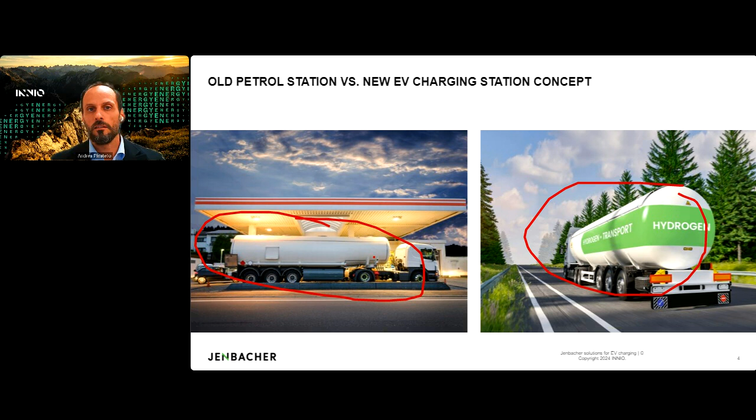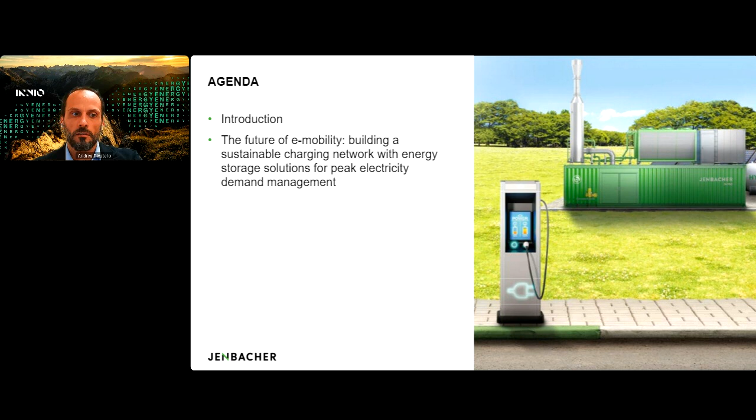Going through a brief agenda, we will see some background information to better understand the numbers behind the future of e-mobility, the solutions that can be offered for these energy storage requirements, and the role our products can play in this future world. Then we will deep dive into the case study, the core of our white paper: a real study to power a 1 megawatt EV charging system with hydrogen. Then there will be time for your questions.

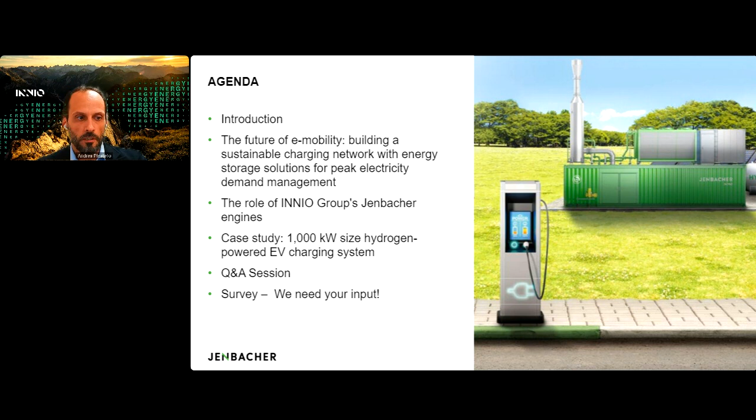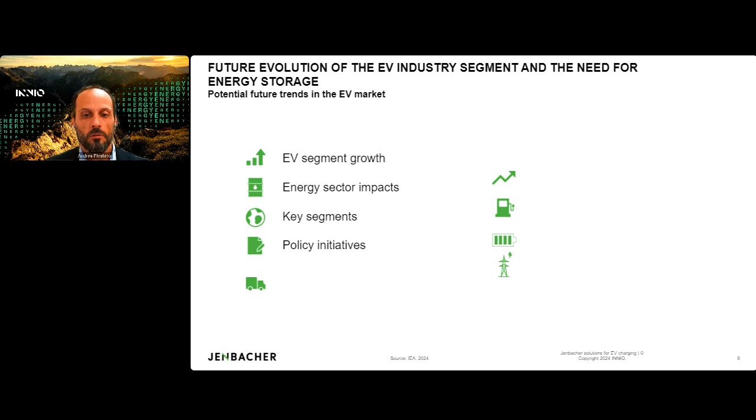So we have also identified key markets, key segments for EVs, like China, where 60% of the global sales is going to, and Europe with 25%. There are many policy measures and incentives for EV and battery manufacturing. For example, there is the production-linked incentive scheme in India. There are, of course, subsidies coming from the US Inflation Reduction Act. And this is also something that applies to the battery production and to the supply chains. There are investments in EV and battery manufacturing for almost 500 billion from 2022 to 2023 globally. So these are numbers that are really, really impressive. There are also emerging economies which are becoming important in this market, for example, in Southeast Asia.

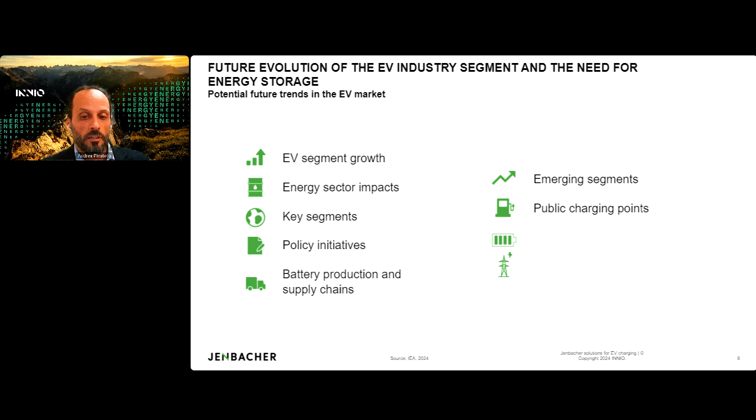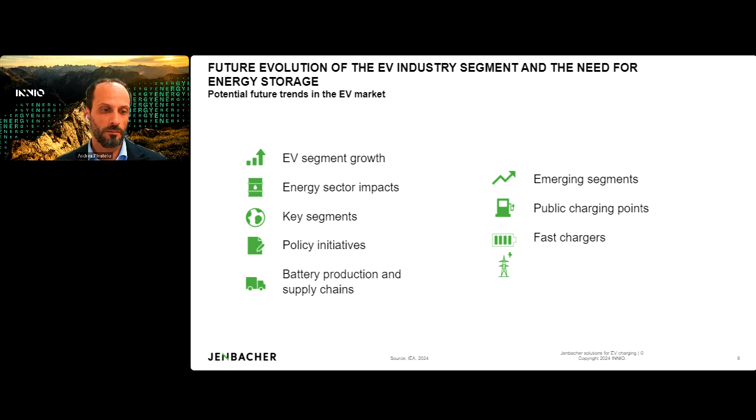And in addition to that, what we see as a very big trendy topic is that the global number of installed public charging points increased by 40% in 2023 compared to 2022. But the aim is to, let's say, increase sixfold by 2035. And then the fast charger. So this is also one of the reasons that draw our attention to the fast charging solution. We see that according to this IEA report, the fast charger will be developing much faster than the slower chargers, also because there will be more electric heavy-duty vehicles hitting the road, and they need dedicated flexible charging. And all of that will have a significant implication for expanding and operating the electrical grid.

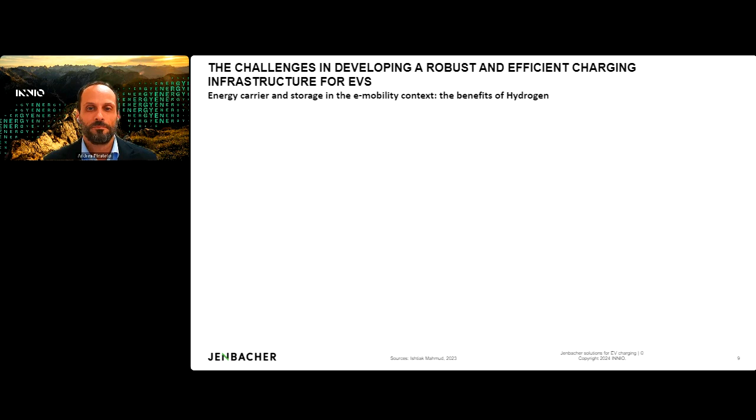And I will continue taking from the last concept about the fast charging that Andrea mentioned before, because we should always remember that one of the main problems when we deal with relying on electric vehicle infrastructure is the fact that there is a very high power demand when you need to recharge a battery with a certain capacity, that is an energy, in a short time.

And when you think of the power side, so the design of a power system capable to support multiple and concurrently charging electric vehicles, you can imagine how the complexity of the system increases. This is because you need large cables, you need to manage the heat management part of the pipe of the electricity, and all these aspects bring challenging cost and investment strategies to follow in order to make the infrastructure

robust and resilient. Another aspect that is important is that this fast charging requires high performance in terms of availability and reliability. And of course, for ensuring that, backup solutions and energy storage solutions can play a pivotal role in supporting the transition.

And the key competitive advantage that we foresee in hydrogen integration in the electromobility infrastructure is that they are not just a storage solution, so they are not just hardware, but they are also an energy carrier. That means that they are easy to transport from one side to another. And at the same time, they can be seen as a storage solution for short, medium, and long term,

while electrochemical energy storage, and I will deep dive into more details later on, has some problematic aspects related to the availability of the material to build up the batteries, and as well that once they are located in a location, the battery is a static energy storage solution.

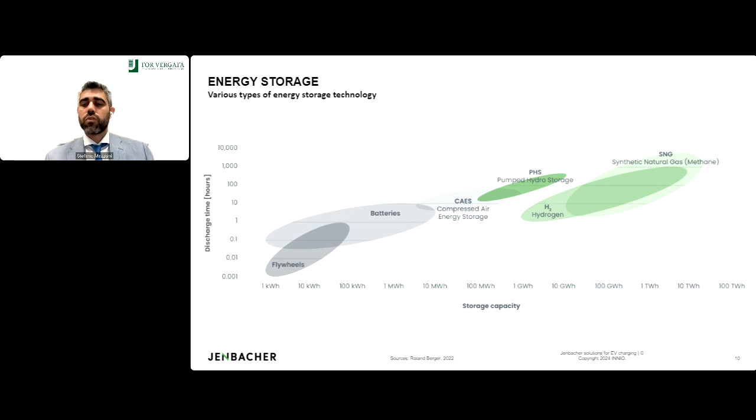So you can see that clearly a solution based on energy carriers can supply and support the trend of the electric vehicle infrastructure forecasted by the IEA to rise up to 5 to 10 terawatts of installed capacity in the next decade. And now I give back the word to Andrea.

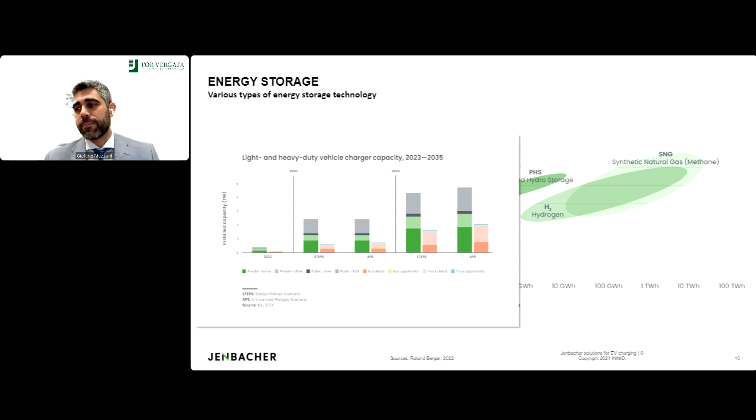Thanks, Stefano. Thanks a lot. So now, before we start with the white paper case, I want to show you very briefly the system concept that we have developed. In order to understand really how we can create a virtual pipeline and bring hydrogen to power the EV site, we need to start with the requirements.

And when we say requirements, we mean how many cars we want to charge, for how much time, and especially what are the cases and the statistics that could help us make a proper simulation of a business case. So we wanted to study it a little bit in detail. It's not easy to find literature about possible loads of this kind of charging station.

But we have been trying to make an iterative process running through technical feasibility and financial viability. So we have done different iterations in order to find the best sizing of the entire process to stay within a megawatt size, which is, in our opinion, a middle size that could be helpful to understand the business case and also develop it for other sizes.

And then what we also targeted was other energy consumers in order to provide a better financial viability of the entire concept. So we will see the details later on, but before we go into the details, let me introduce the core of the idea.

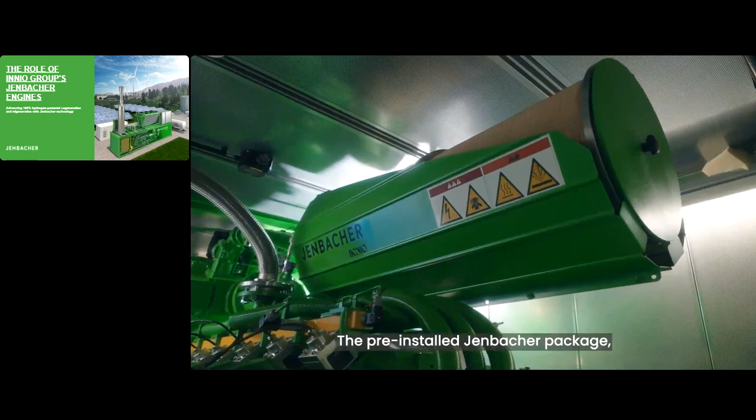The core of the idea is the Jenbacher engine, which is capable to run with 100% hydrogen and can provide power generation and cogeneration and trigeneration as well. And I would like also to show you this brief video, which shows very clearly the product that we are talking about. So this is a containerized unit of 1 megawatt size producing electricity with hydrogen. It is a plug and play solution.

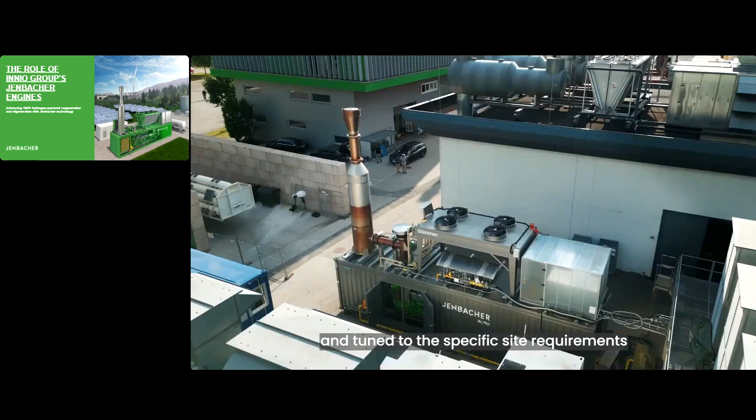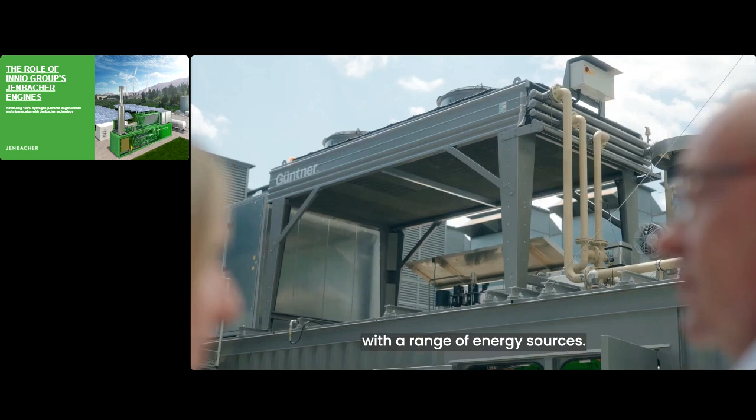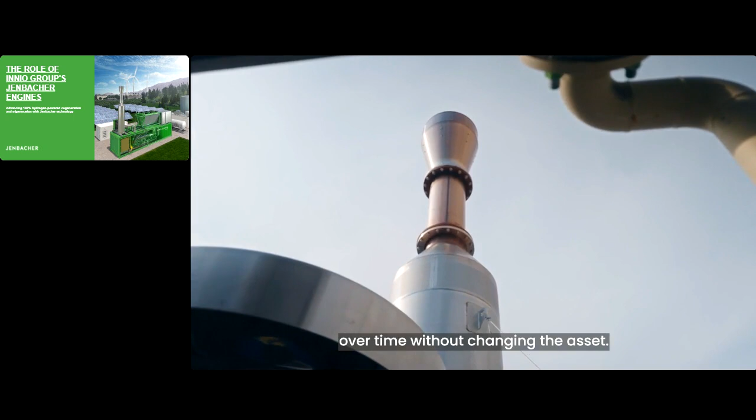Here you see the video from our factory in Jenbach, where we have tested this solution some months ago. So it's quite a recent project. And so many details, some that are familiar with our products know, but here really you just need to plug the hydrogen source and the electric cable, and you have a turnkey solution that can really very fast provide the solution to the infrastructure, because really in few months you can go from the start to the deployment very easily.

So category A is the standard engine that is already available with capability to run up to 5% of hydrogen in the pipeline gas without any modification. And there is also the optional standard product, which could run up to 25% of hydrogen in the pipeline gas. Then we have the second category, which is the most interesting one in terms of this timing of transition from the natural gas to the next phase.

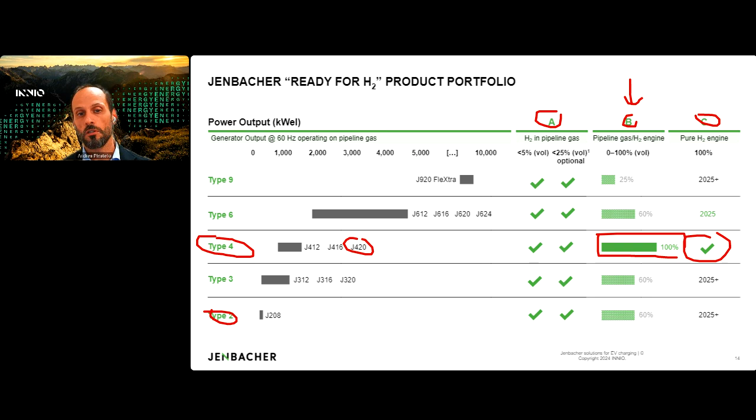And this is category B, and this is an engine that is capable to run from 0 to 100% in volume of hydrogen. And you can see here that the Type 4, which goes from 500 kilowatt to 1 megawatt, is capable to run 100% hydrogen. Or as well, which is category C, we can run with only a pure hydrogen engine. So in category B, you can run with 2 fuels, dual fuel, hydrogen and natural gas. And with category C, you can run only with pure hydrogen.

And here another slide in order to illustrate a little bit better what I just said before. So this shows really the demand from our customers when they want to go to an asset that is capable to run in different solutions, but with the same asset. So they can start with a natural gas asset capable to run up to 5% volume of hydrogen. And then the same asset can be, with a low-cost package, converted to ready for 25% hydrogen. And then with another package of modification can be switched to a hydrogen asset. So here we see really the flexibility of the same asset to run through the demanding period of the transition that we are facing today.

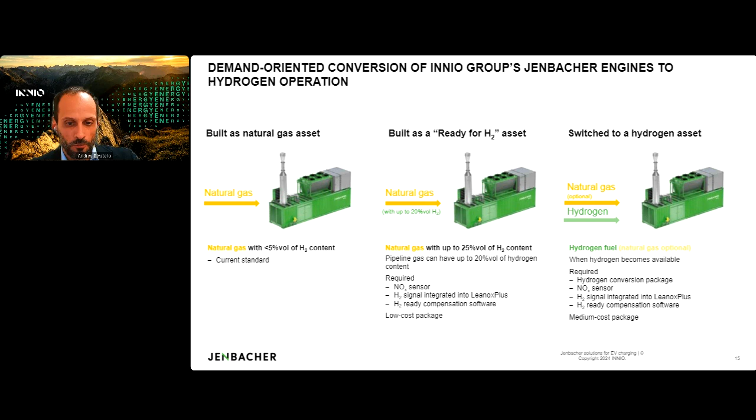And last but not least, I would like to show you some of our projects worldwide with hydrogen. And in particular, I would like to mention HanseWerk in Germany, which was the first plant that has been converted from a natural gas source to a hydrogen source. So this was an existing engine that was running on natural gas, and the customer wanted to change it to hydrogen.

And another one that I would like to briefly mention is RAG, Austria, which is the first European cogeneration plant running on hydrogen. And in this project, our customer is producing hydrogen during the summer period and is storing this hydrogen in an underground storage to use the summer sun to power the winter energy. So this is really the concept that Stefano was illustrating to us before, that we need this kind of energy vector in order to use the energy from renewables when there is no possibility to do so.

So now I think we are ready to deep dive into the case study. And again, we have seen this overall concept. So we will start now with the first flag, the start requirements, where everything is starting from. So the number here we are showing you is that we are targeting 8 charging stations of 125 kilowatt of power. And making some evaluation on the loads, we have been working together with software for simulation,

which is called Xendee. And with this software, we are able to simulate EV charging demands. And we are able to make the design of the load curves according to potential usage of the charging system, of the charging of the vehicle. So at the end of the day, after many iterations and many assumptions, we have ended up with a load curve, which is here one simplified version.

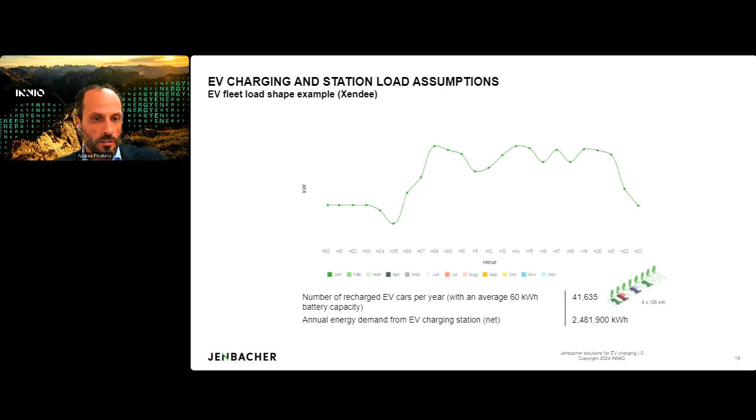And we end up that we can charge more than 40,000 cars per year, assuming that they have an average 60 kilowatt hour battery capacity. So in total, we are summing up to more than 2.4 million kilowatt hours, right? So this is the starting point of our assumption. And now I leave the stage again to Stefano to proceed with the technical.

Yeah, thank you, Andrea. I will deep dive a bit more into the mathematical formulation of the problem, but then I will sum it up in a more practical way. After having set the demands, so how much electricity we need to satisfy with the green hydrogen generated, we need to understand from the technical perspective and from the economic perspective which are the optimal configuration of the renewable energy source, of the backup and the energy storage, plus the transportation capacity that allow the solution to be economically viable, both from the end customer perspective and from whoever generates the green hydrogen.

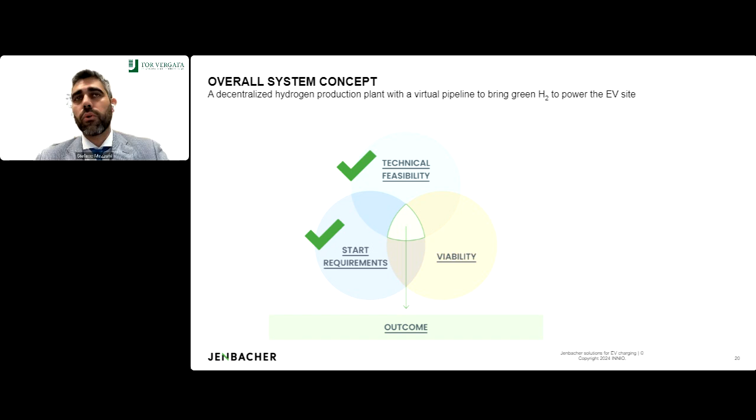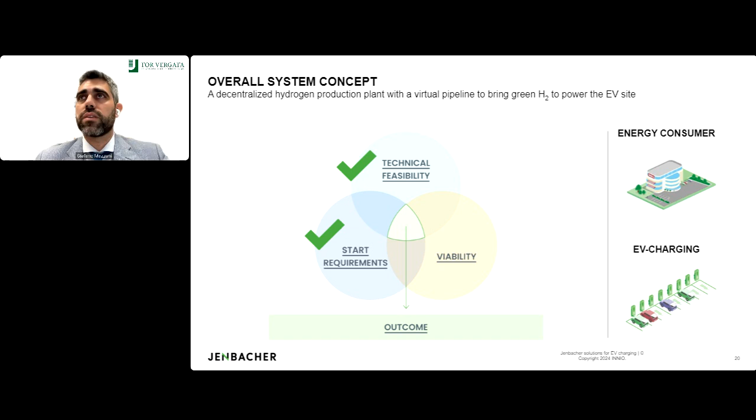So for doing so, we have developed together with Andrea and INNIO a model that we run to validate some of the data available in the literature to understand how we could supply concurrently electricity for electric charging at high tension, so for fast charging, and then given the capacity of cogenerating of the CHP unit equipped with the INNIO engine, also additional assets such as heat and cooling for energy consumers.

So the results of the optimization, that was a constrained optimization based on a mixed integer linear programming approach, we were able to establish the capacity of the solar field that was in the size of 12 megawatt. And the electricity generated by the renewable energy resource, as you know, is intermittent. So we can supply the excess of the electricity to the grid when not needed. We are able to charge an electrochemical energy storage of 8 megawatt hour. This is the result of the optimization.

And how we establish this number? We establish this number because we need to be able to feed electrolyzers with a capacity of 70 kilogram per hour of hydrogen. So this is the constraint that we had from the optimization perspective in order to satisfy and supply all the electricity demand for charging the up to 40,000 vehicles in a year that Andrea mentioned before.

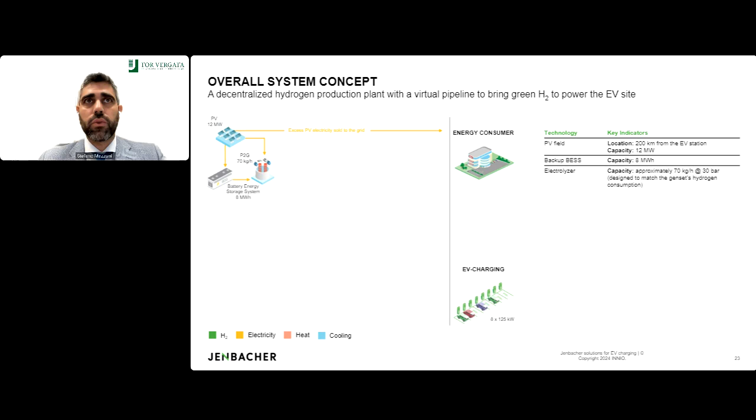What we did was, on the first stage, we used the data given by Xendee, that is a software platform used by Andrea for running the preliminary simulation to understand the solar availability in the field. And then we integrate with some tool that we developed internally in the university, on an optimal dispatching profile in which we understand how we should operate.

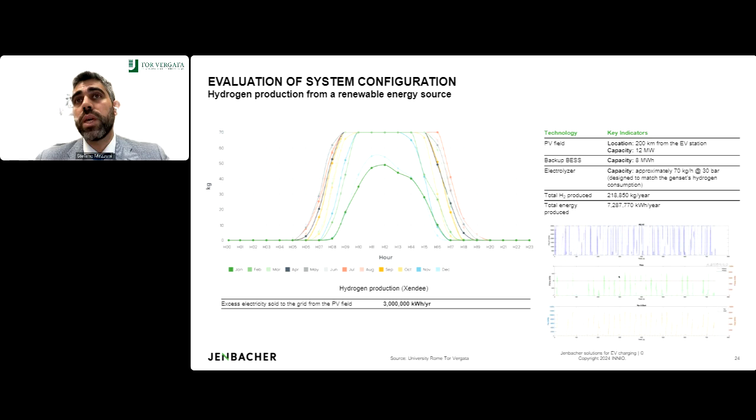Here it is a bit light, but there is a light gray line that shows the state of charge of the battery, in order to guarantee that the electrolyzer can work almost at nominal load, because the electrolyzer suffers from part load operation, for the largest hours of the day possible, and simultaneously to be able to export the electricity when the grid requires it.

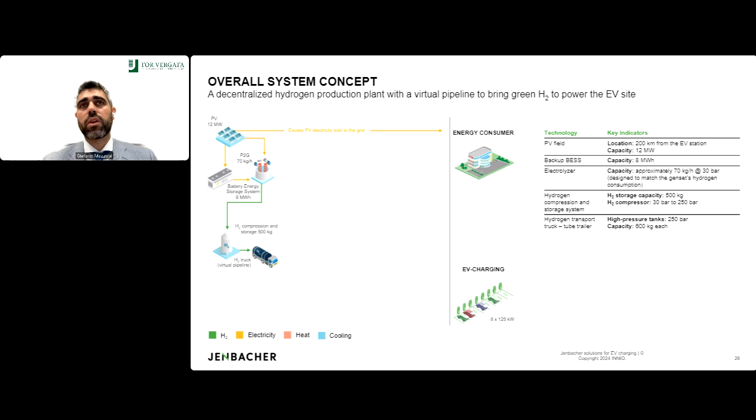So as a result of the optimization, we were able to supply an almost constant load to the hydrogen compression section, which was designed with a 500 kilogram hydrogen storage tank with a pressure between 30 and 250 bar to be delivered by the compressor. And at the end, to deliver the hydrogen produced in site A to site B, that in our assumption was about 200 kilometers far from the electric vehicle station, we needed to adopt a virtual pipeline. So basically, we're relying on H2 trucks.

We make some calculation, of course, because it's fundamental to account for the embedded emission in the transportation process, given the fact that they run on diesel fuel, gasoline fuel, and to account also for the cost of the transportation that should at the end of the day be included in the levelized cost of hydrogen evaluation.

And by the assumption that we received from a vendor - Andrea will give you more details later - on the details of the H2 truck company, we're able to calculate almost 1.4 euro per kilogram of hydrogen of transportation with an emission below 0.4. This number is very important, because a number in that order of magnitude would allow incentivization mechanisms in other parts of the world. I give you back the word, Andrea.

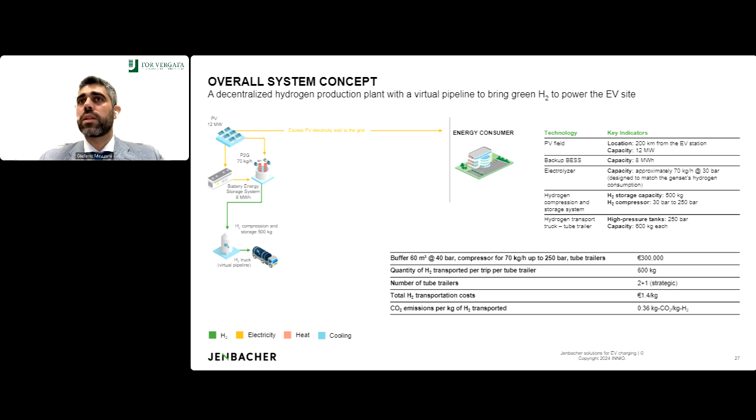Yes, thanks, Stefano. So if we look here to the truck that we see represented, what we wanted to do is ask a specialized company called PRF to make a study for us regarding this specific case, in order to provide the best solution to transport the hydrogen from site A to site B, which is 200 kilometers away.

So what they did was calculate the buffer storage, calculate the compression system, and calculate how many trailers are needed. So we have 2 trailers plus 1 strategic. And with this configuration, we are able to bring the hydrogen in the quantity needed by the load that we have seen in the previous slide.

So this calculation was really, really important in order to check what are the hydrogen transportation costs. And of course, we have also done some literature research to see if our assumptions were correct, and we see that these numbers are aligned. Again, I would like to remind you that all the detailed information is written in the white paper.

So here, for the matter of time, we cannot go really into all the details. But if you have the pleasure to read the documents, you will find all the answers to maybe some questions you could have. I would like to highlight that you have the possibility to make your questions in the broadcast system. So you can go to the survey and input your question, and we will be able to answer all of your questions at the end of the webinar.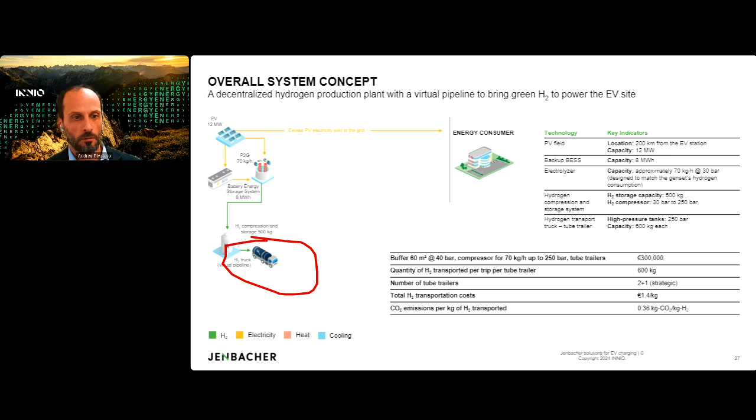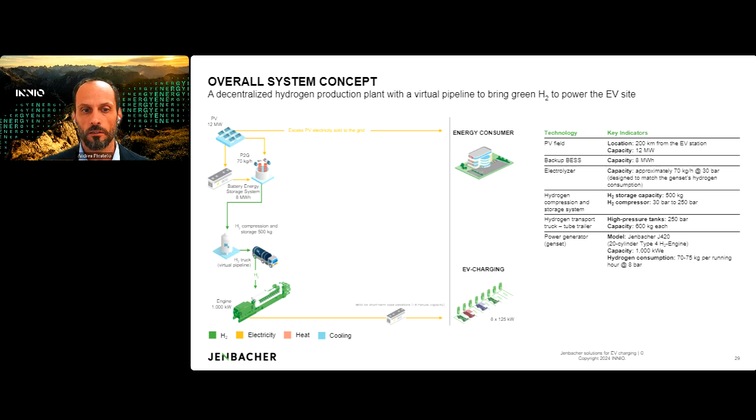So when we bring the hydrogen to the site of use, here we find the engine. The engine that we have seen before will take the hydrogen and produce the electricity for the EV charging. In the simulation model, the simulation suggests us as well to include a small battery for taking the fluctuation of the EV charging load curves. So here it is an additional little battery, which helps us stabilize the flow.

And yeah, so what we have to do is comply with this load curve. In addition to that, we want to use all the benefit of the engine as well on the heat side. So in our assumption, we are thinking to deploy this solution to an EV charging station, which has also some other energy consumers like a little shopping mall or restaurants and so on.

You know that there are small and big charging areas. So this is more targeting a big size charging area with a lot of facilities. So they have heat demand. And what we have done as well in the simulation was to include an absorption chiller and a peaking boiler that runs on hydrogen as well, in order to fulfill the load from the thermal side of the mall or of the charging station altogether.

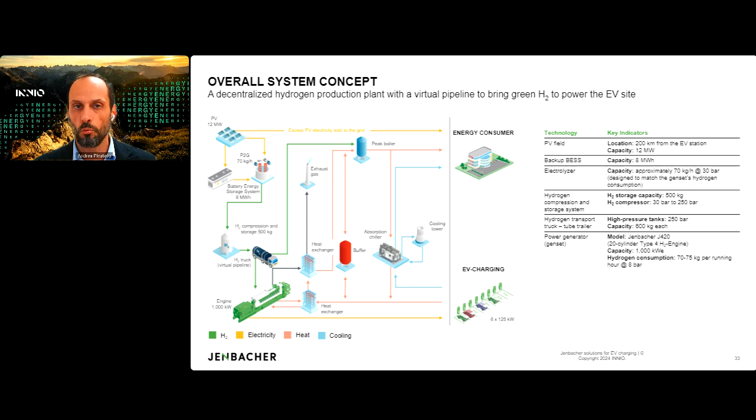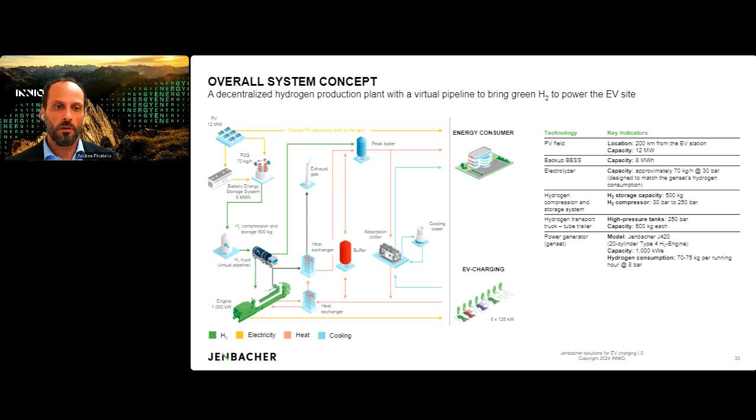So here we want really to squeeze out from the engine all the efficiencies possible, because this hydrogen that we are delivering is very precious and very expensive, so we don't want to waste anything from that. So the efficiency for us was really an important pillar to highlight that, you know, efficiency still plays a big role even in the decarbonization path.

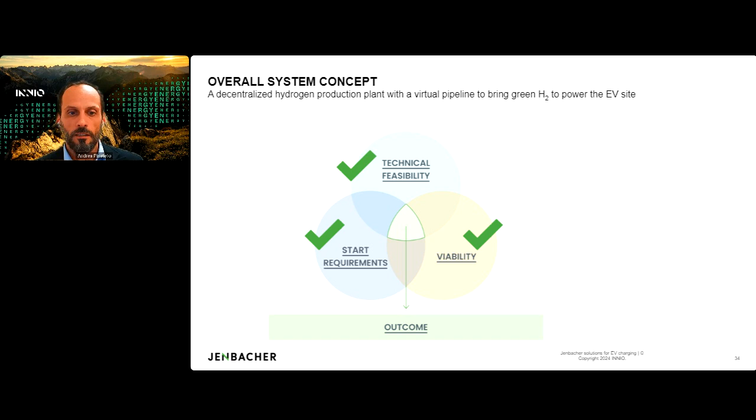And then what we wanted to do was see if this idea, technically developed, was also financially viable. And we will see now how the numbers will come together.

So in terms of cost, we have used cost from the market, and we wanted to give real figures for installed equipment. So we were considering CapEx and OpEx for a period of 15 years, because 15 years is the normal time for this kind of project with a cogeneration unit. So we wanted to make altogether cost for capital expenditure and operational expenditure in one line, and what it ends up, if we sum all the items in this simulation, we reach a number of 25.5 million euro for the 15 years. So this is one important baseline. You might think it's a big number, it's a small number. We will see it later.

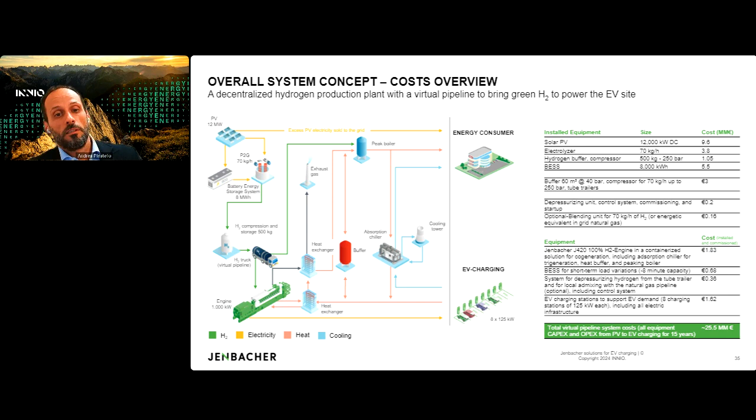And here I, again, hand over to Stefano.

Thank you, Andrea. The first evaluation of the capital expenditure was fundamental, because for accounting the overall cost of the hydrogen generated from renewable energy source to the electric vehicle infrastructure, we need to account for all the costs, including capital cost, operating cost, and the amount of hydrogen produced.

Here we make a brief sum up of the constraints. We needed to deliver about 2.5 million kilowatt hours of electricity for the charging station. We account for above 40,000 vehicles. We have roughly 2 million kilowatt hours of heat generated by the cogeneration unit, leading to almost 1 million in revenue or savings compared with a typical district heating price of 4 cents of euro per kilowatt hour.

And we arrive at the cost of the green hydrogen, in a range between 10 to 10.5 euro per kilogram. The question could be, is this price high or is this price low?

This is very interesting to discuss, because if we had run a simulation—and we did this during the project with Andrea—just for the month of August, this cost would have been around 6. If we had run that only during February, the cost would have been around 14. So the message is that this price accounts for all the seasonality we encounter over a year in a continental climate region like Europe.

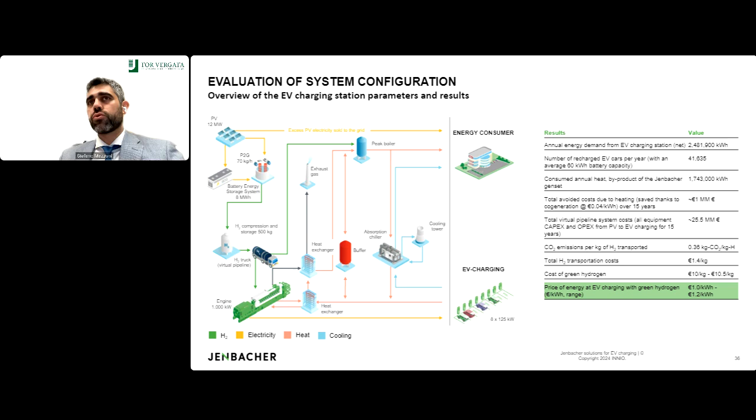So I give back the word to Andrea.

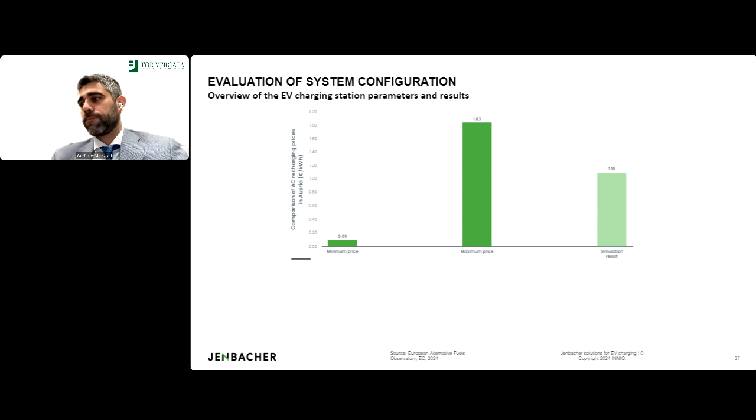Yes, thanks, Stefano. I will take exactly from here, because when we look at the numbers, we have 1.1 euro per kilowatt hour on average at the charging station. If you look on the European Alternative Fuels Observatory, you find all the prices of EV charging stations.

What we've plotted here is the example for Austria, because Jenbacher is from Austria, and the minimum price Austrians paid for charging the car was 0.09 euro, which is very, very small. But the maximum price was 1.83. So this is a real number, which is higher than our calculation of 1.1.

So what we want to say here is that we are proposing a solution with this final number that has to be paid by the charger, but this brings them half an hour of charging the car with green energy, with a very, very small CO2 quota.

And then the topic is what happens if some incentivization scheme applies. We have done a lot of additional reflection on that, and you will find in the white paper how this simulation result can change. We will see this a little bit later on.

And I think now it's your turn, Stefano, to proceed.

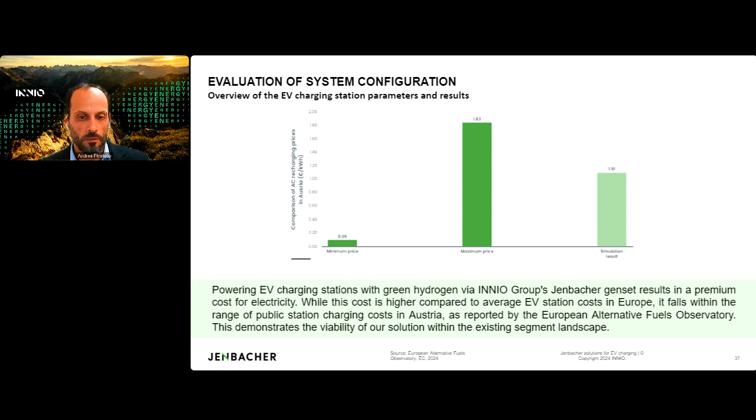Yeah, thanks, Andrea. Following up on what we said at the beginning, there are schemes that allow for getting some incentives, and these numbers are reported in the white paper. But the message behind this chart is that we propose a sensitivity analysis on net present value, accounting for capital investment, operating cost, and the equivalent cost of the hydrogen to evaluate the viability of the investment. We propose four scenarios in this case.

One is where we are able to get incentives of around 2.5 to 3 euro per kilogram of hydrogen while maintaining the selling price of electricity at 1.1 euro per kilowatt hour. And you can see, let me get the pen, that we have a payback time in the order of 4.5 to 6 years.

Then we make the worst case scenario, in which the cost of hydrogen is the highest without incentives at all, so 10.5, and in which for making the viability of the solution below 10 years, we need to increase a bit the cost of selling electricity for the electric vehicle to around 1.2, with payback between 8 and 9 years.

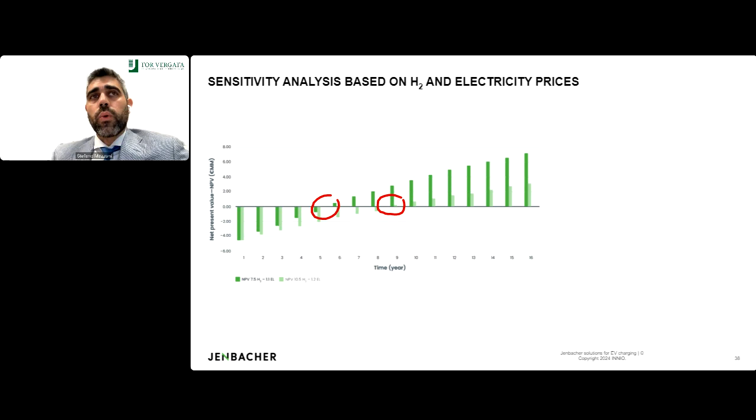Now we also explore a case scenario typical of what can be a Euro zone incentive mechanism, in which we can have a 9.5 euro per kilogram of hydrogen cost and 1.2 euro per kilowatt hour, and we can shrink down the payback period to around 7 years.

And then we have the most promising scenario, in case we can reduce a bit the cost of generation and access different kinds of incentivation schemes, in which we can keep the same payback period of 9 years, but help the end customer lower the price to a cost of 90 cents per kilowatt hour.

And this is really a feasible target from our perspective, because it is what the technology is going to move forward at, so the capital cost will reduce. The incentivation mechanism will play an important role, but the solution can really meet the up-to-date price for the fast charging station.

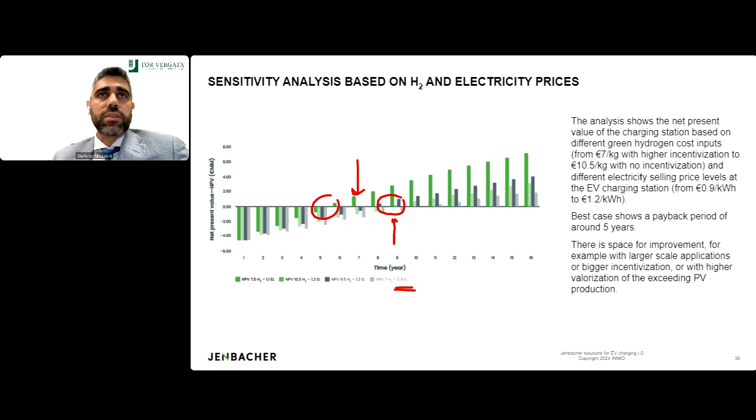And this is something where you can find more details. Here we have just some numbers that we already discussed. And I think I'll leave the word to Andrea to sum up all the findings of our white paper.

Yes, thanks Stefano. I think we've reached the end of our case explanation, but we would like to give a little bit of an overview of the overall system.

So you see here in this schematic all the information from the start requirements on the hydrogen production site, on the virtual pipeline for the hydrogen supply. We have discussed why we chose this kind of solution, because the system was providing us different iterations, both in terms of economics and in terms of technical solution.

And what we wanted to highlight is that the consumption on the site must be as efficient as possible in order to maximize the income and the potential return on this kind of investment. So finally, the viability, even if the cost to make everything together is expensive, does not consider any additional cost for the infrastructure or any delay that someone has to wait for the infrastructure to be ready.

The fact is that with this kind of configuration, you can produce green hydrogen in a location which is more convenient, because normally the routes of the cars are already defined and already very busy, and there is no space enough to locally produce the green hydrogen and supply with a very short connection the hydrogen to the point of use of the cars.

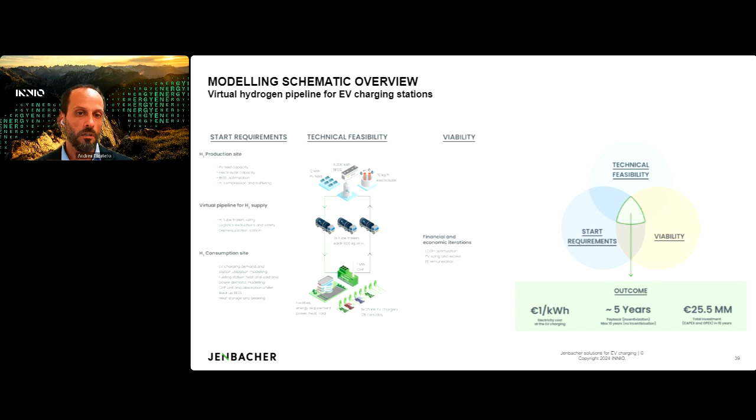It is not the end of the presentation, it is the starting point, because in INNIO, in Jenbacher, we have the capability to run through this kind of simulation. So we can also get support from an academic point of view in order to bring us in the direction that is needed, and in case we can come up to a financial viability of an interesting operation or business case. So what we have done, just to finish, is a comparison with the battery.

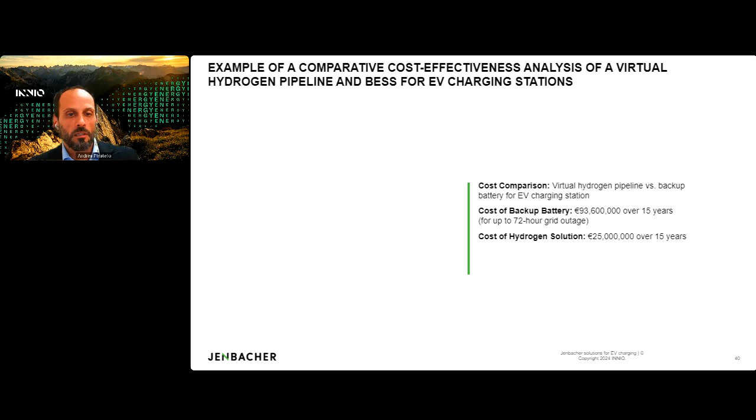Because one can say, okay, even if maybe I have the grid, maybe I just want to have a backup during a short period of time. Maybe during the summertime I will have a rush of people that will go on vacation. Everybody wants to do EV charging at the same time. So maybe I just put a backup battery that can support me, for example, for the weekend. So we assume a 72-hour grid outage.

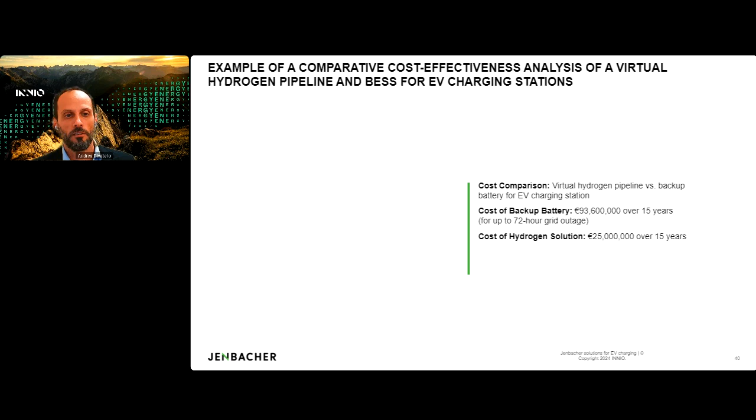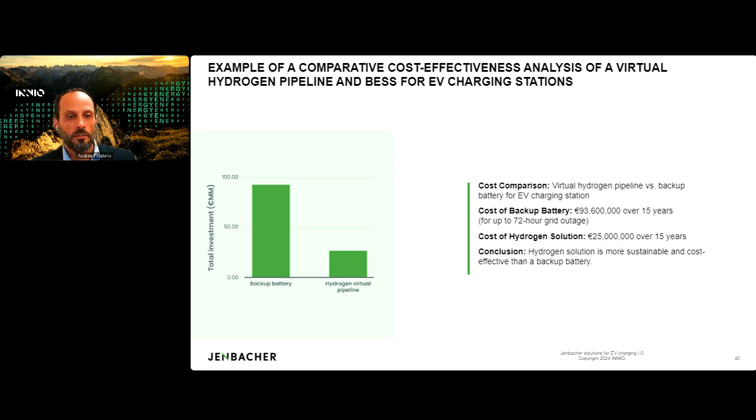How much does this backup battery cost? Assuming that I have the space on the station to put these backup batteries, very easily for a 15-year period, just having a battery for 72 hours would cost 4 times the cost of the entire hydrogen solution that we have seen before. And the hydrogen solution could cover the complete charging station for all the hours that are needed, not only during outages or during the weekend. So this is another thing to reflect on: the battery as a solution compared to hydrogen as the storage.

And to wrap up, we started with the problem of grid support, to see how we can solve the problem of the grid and how we can leverage the development of the EV market. Then our work was to study scenarios, make some calculations, see how we can optimize the processes, how we can use the heat in this kind of situation, and analyze which kind of incentivization must be used.

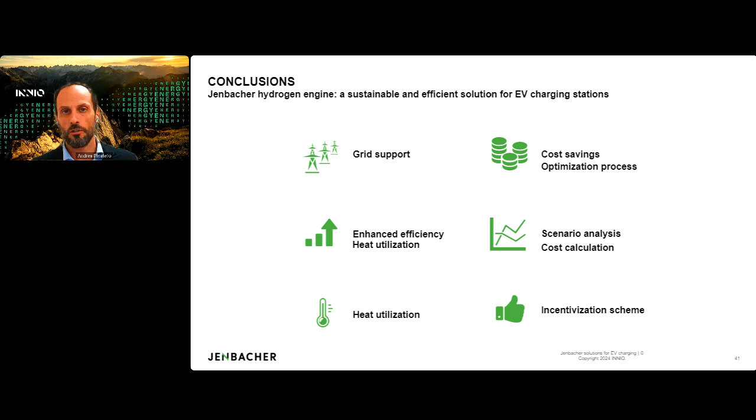So what is the final message? The final message is that there is no one solution that can be applied in every place. In every kind of situation, you have to make cost analysis and simulation, and we need sophisticated tools to perform these simulation scenarios, because there are a lot of calculations to do in the background to really understand what is the best optimization for each process.

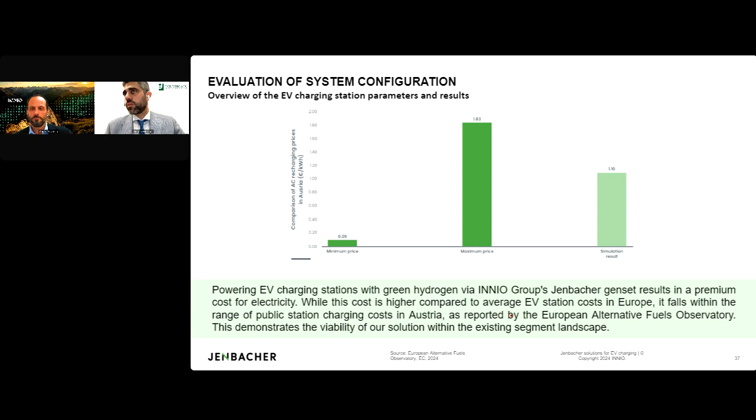So I'll ask this final question before I conclude this Q&A session. What is the difference between 1 megawatt hour energy saving capacity in battery or in hydrogen? Sorry, okay. What is the typical hydrogen supply? No. What was the question? I think this is number 12. What is the difference between 1 megawatt hour energy saving capacity in battery and hydrogen?

So I can guess that what is meant is the storing capacity in battery and hydrogen. Well, the main difference is that the energy content is the same. The difference is that a 1 megawatt hour capacity battery has a round trip efficiency up to 90 to 92% when taking into account the latest lithium battery solutions. But it's hardware, so you have the physical hardware to be located, connected to the grid, and powered by the grid.

The content of 1 megawatt hour in hydrogen means that if you divide by roughly 33.3 kilowatt hours for the low heating value of hydrogen, you have more or less 30 kilos of hydrogen that you can bring with you in a small tank, and you can use it wherever you like. Of course, there is a discharge efficiency in this case, to use a similarity to battery, that depending on the energy converter technology can be lower, but you save a lot of costs in terms of investment compared to the battery, because you are dealing with the energy content of an energy carrier.